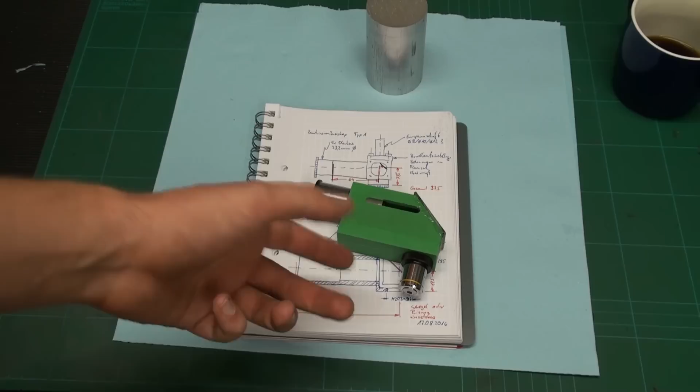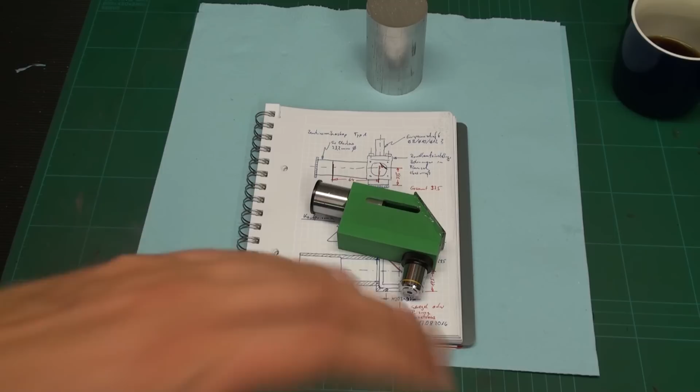Today I wanted to start a build on something that I wanted for the longest time, but I don't want to buy it. And that object is a centering microscope. That's a microscope that you clamp up in the spindle of your milling machine, and it has a right angle eyepiece, and you look into it and you can look down through the center of your spindle on the workpiece. It has a crosshair, so you can pick up marked out lines or edges of workpieces or just everything you can see.

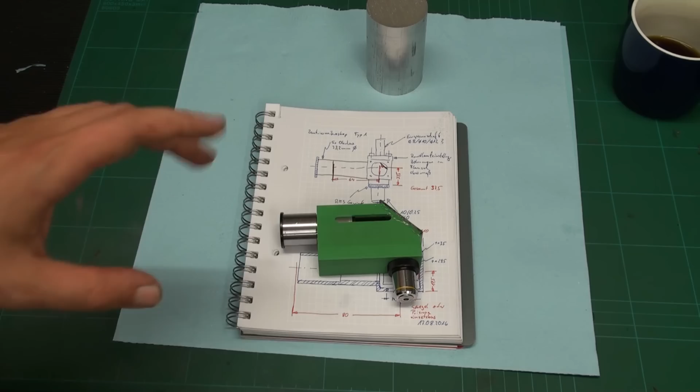There are a lot of manufacturers that build them in very high quality, but they are quite expensive when you buy them new, and even on the used market on Fleabay or something like that, you pay quite a lot of money. And being very ignorant, I was thinking I could build my own. I ordered some microscope optics on eBay. This is a 5 times eyepiece, and this is a 10 times lens.

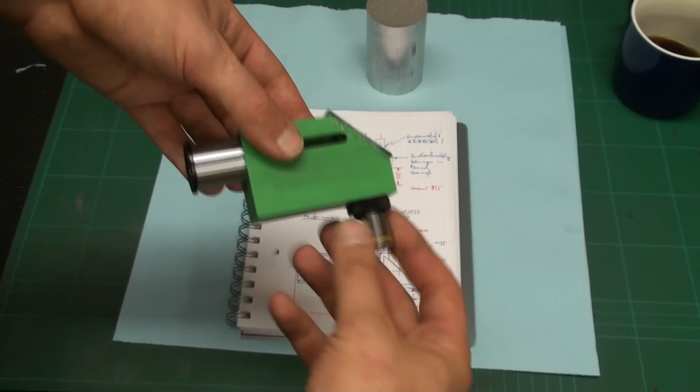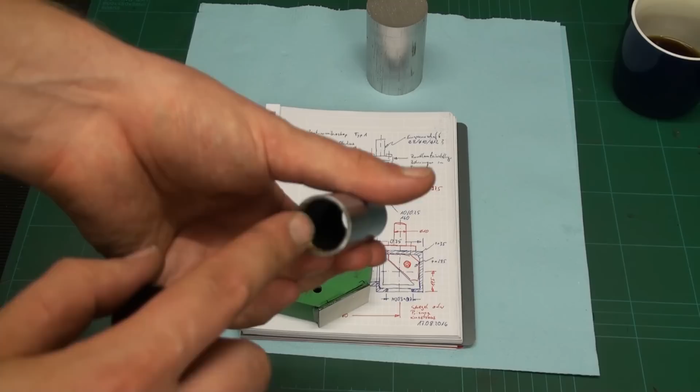Got screws in here, and this is just a very rough prototype. I took a piece of RenShape modeling plastic and I machined out this prototype. The eyepiece goes in here. Down here is a mirror at 45 degrees, like in a periscope. I'm going to add a crosshair that has to go into the eyepiece. We can unscrew the back side here. Then we can place an insert with a very fragile wire crosshair in there.

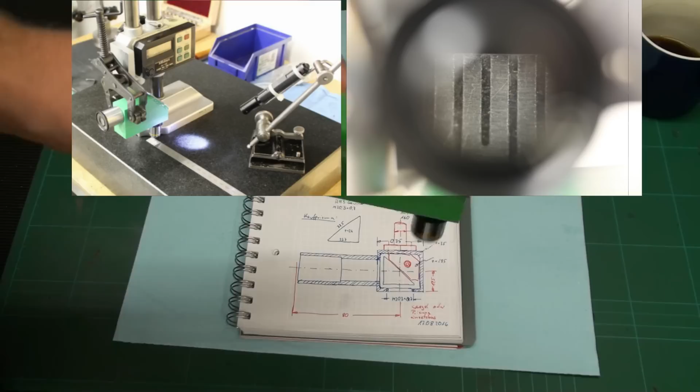But as I said, this is just a prototype, and it has obviously no way to clamp it in a milling machine. I had this set up on the surface plate, clamped to my height gauge, and I just set it to height and watched through it against a steel rule to see if the magnification is good enough and if the working distance, which is about 8 millimeters, is good enough. And yes, 8 millimeters is, for me, okay.

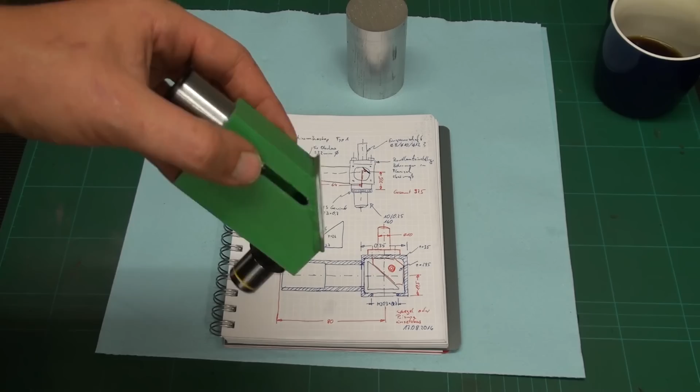And yeah, this is just proof of concept for me, because I know approximately nothing about optics. In the final design, I don't want to use a mirror. I'm going for a prism. I ordered an optical glass prism that I'm going to use, and it will be machined out of aluminum.

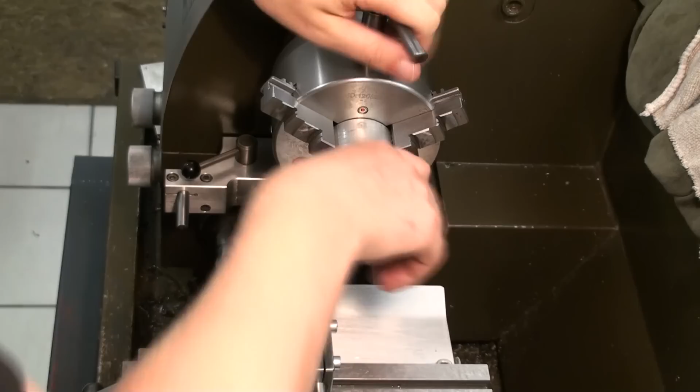Okay, there we go. That's the chunk of aluminum. It's free cutting aluminum with some lead content, so the chips break nice and short. And I'm facing it off on one side. And I break the corner with a file. Now I'm turning down the step to about 25 millimeters in diameter. That's the part of the microscope where the eyepiece will go in. And as you can see, the material produces a very nice short chip. The occasional rat's nest still happens from time to time, like on the end of a cut.

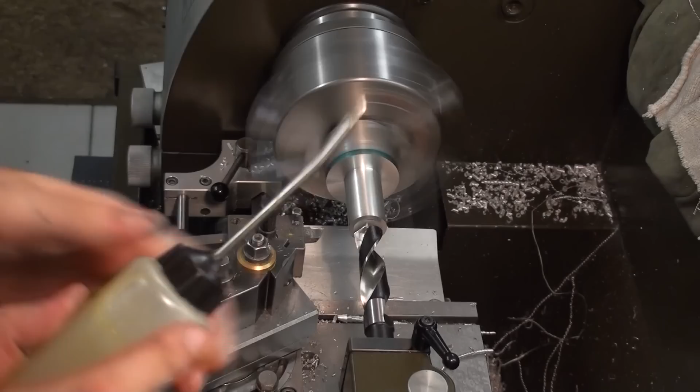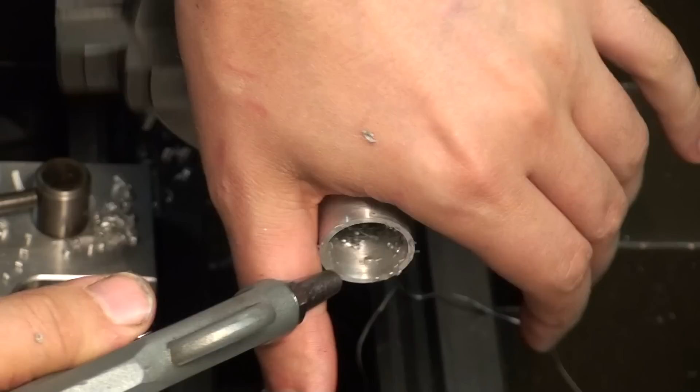Taking a face cut on the end, and we drill out the center with a 19 millimeter stub length drill, using some water-soluble oil to lubricate the cut. And boring it to final dimension. I'm using one of my shop-made high-speed steel boring bars that I showed in an earlier video. Taking a finishing cut. And the eyepiece fits quite nice. I'm breaking the corners with a scraper. That's the quick and dirty way when you don't want to use a chamfering tool.

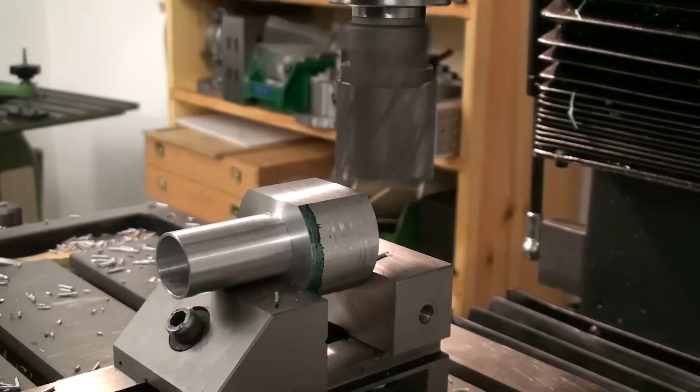Now we're over at the milling machine and we mill down the remaining cylindrical part to be square. And I'm using a 40mm Morse taper 4 shell end mill that has an integrated shank. This is quite a nice cutter. It's carbide tipped, and back in the day this was a really expensive cutter. I'm pretty sure the carbide goes along the whole length of the cutting edges.

Then I roughed out the inside with a 10mm roughing end mill to a depth of about 30mm, and the vacuum cleaner is a great help when you cut such deep cavities. Finishing the sidewalls with a relieved 6mm end mill, very long stick out, but works very well. And first finishing cut, and again taking a light finishing pass to clean up the walls.

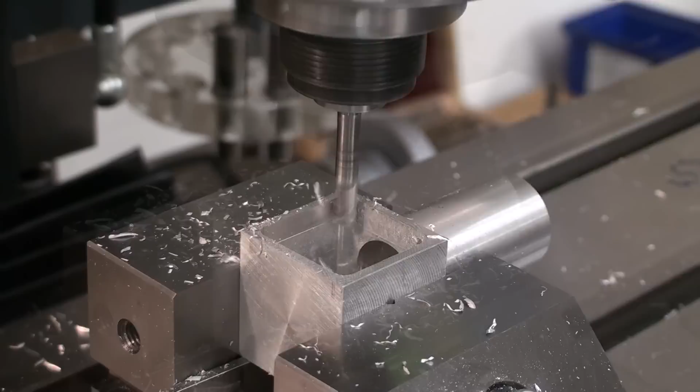Next step will be to change the setup. Here you can see the cavity. We rotate it by 90 degrees, set it up in the vise again, and use a rotor broach or a core drill to hog out a hole for the microscope lens.

And we change to the Wohlhaupter boring head and machine the hole to final diameter. Taking a roughing cut and the finishing cut. The thread is an M20.3mm thread with a 0.7mm pitch.

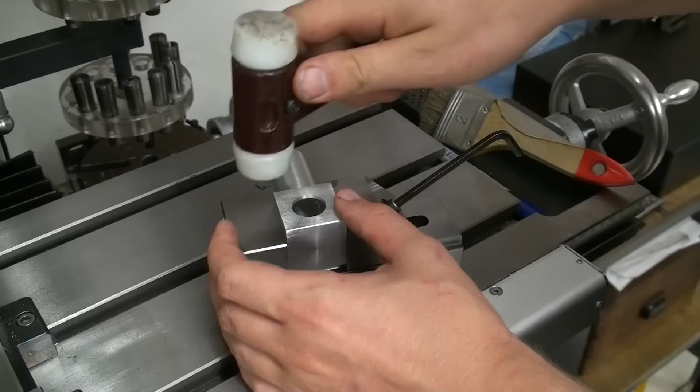That's the part finished on the milling machine. Now we set it up for threading. I clamp it in the grinding vise, seat it down, just very lightly tapping it down, and I set the grinding vise on the four-jaw chuck in the lathe. I'm using the bull center and the tailstock to align the bore.

Just to give me a starting point. Lock it in place. And do an idiot check if the bore is on center. And it was within 2 or 300ths of a millimeter. Now I'm cutting the thread. I have the setup running at about 100 RPM. And it was not a problem at all.

The microscope lens fits very nicely into the thread. No problem whatsoever. And this part is almost done. Needs only a little deburring, but I'm quite happy.

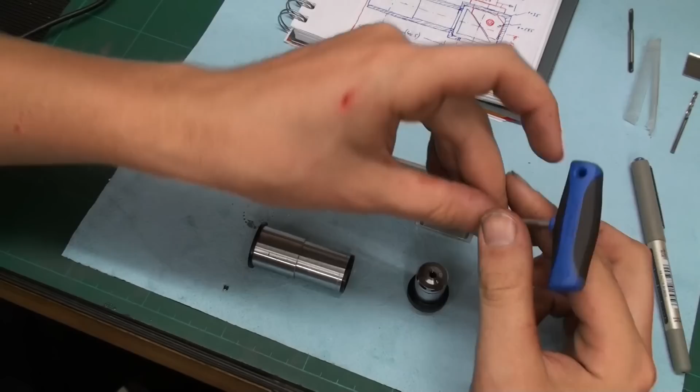Off camera I machined some additional parts. I made this shank with 10mm diameter, which can go into a collet of the milling machine, and it screws onto the body with 3 screws, and the holes in this flange are oversized, so when I loosen the screws,

these 3 guys here, I can move the shank around, and I can use this to center my crosshair, which I will add to the eyepiece, with the line of sight, so to center it with the line of the spindle, so when you turn this, it's always in the center of the spindle. For that we need the run-out adjustment.

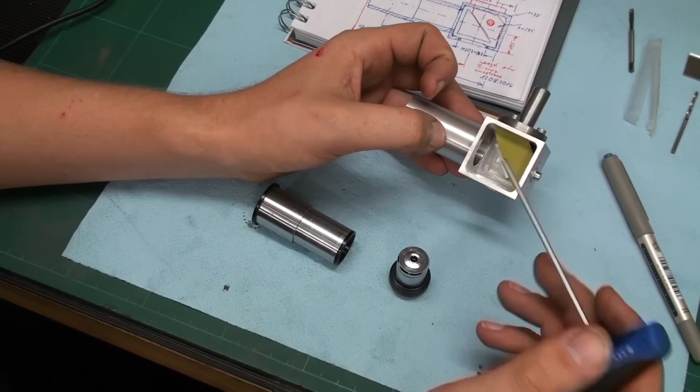I also made a triangular piece. This is some polyurethane foam modeling plastic. I took this material just because it machines very easy and very fast. It's good for prototyping. And I machined it at 45 degrees. It screws into the body from the outside through the slot.

I had the intention to make it adjustable through the slot, but then I decided just to let it rest against the inside of this housing, and I glued a piece of mirror, which is not the best choice. This is just a shaving mirror that I salvaged and cut down, and this piece is just super glued against this triangular piece, and it's in the line of sight of the eyepiece.

And that's pretty much all. Down here we have the thread for the microscope optic or the lens, and here we have our close fit, not very close, for the eyepiece. And that's how it looks now. This is the prototype. Now we can set it up in a milling machine and take a look through the eyepiece. We will see if we can get a video image through it.

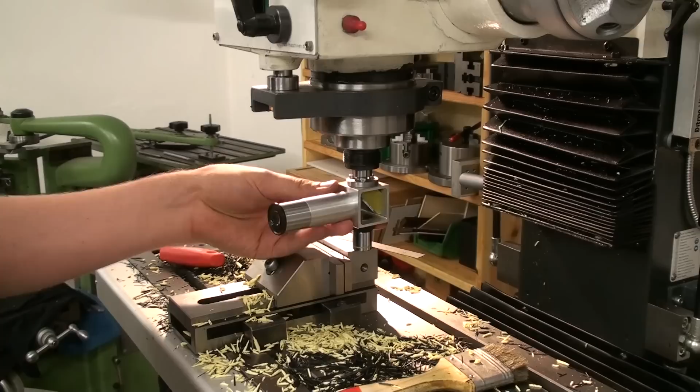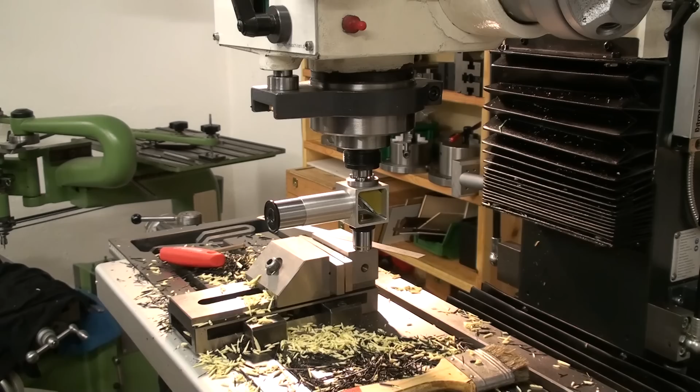So let's see. Okay, I have a 10mm collet in the spindle. Clamp it up and make sure that you don't turn on the spindle of the machine when you have something like this set up. This might get ugly. And now we have our microscope in the spindle.

Okay, we have a more or less clear view through the eyepiece. This is quite hard to set up. And as you can see, when I move the steel scale under the microscope lens, you can see it moving in the eyepiece. And by moving the quill up and down, I can adjust the focus, and I can move the part with the cross slide under the microscope.

So far this works quite well. I'm very happy how this came out so far. And the only thing that's left for a centering microscope is of course a crosshair. And then we can use it to pick up features on parts and also use it for measuring if we use the DRO.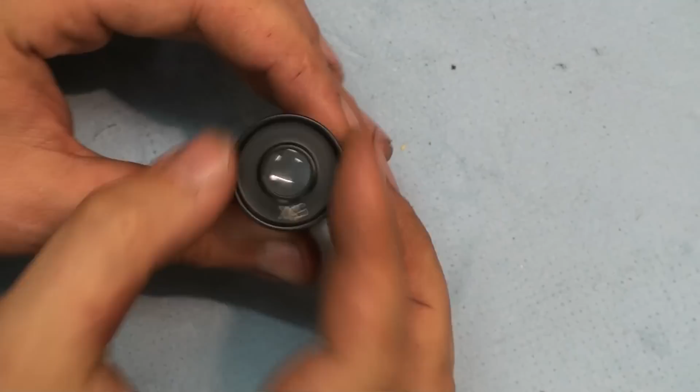Okay, I figured out the crosshair. When we take a look through the eyepiece here, you can see that I have a crosshair now. It's out of focus because the camera is focusing on the stuff around it.

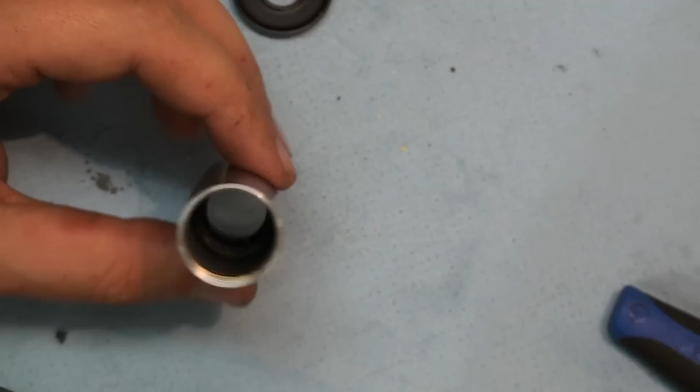But when we take the rear lens off and take a look inside, and I need something to point at, you can see the crosshair down in there. The material for the crosshair is 0.1mm copper wire. This is insulated copper wire for winding spools or inductors. The electronic guys have that stuff on hand.

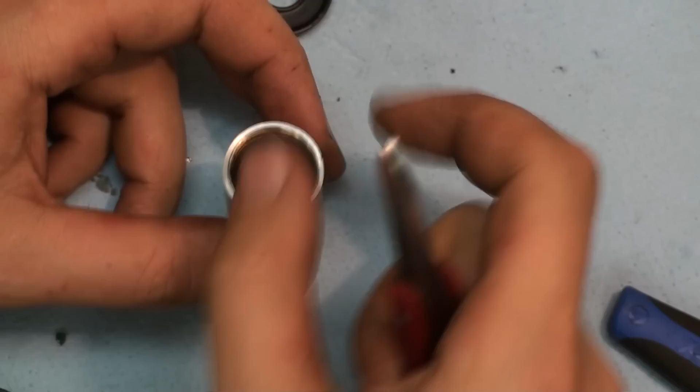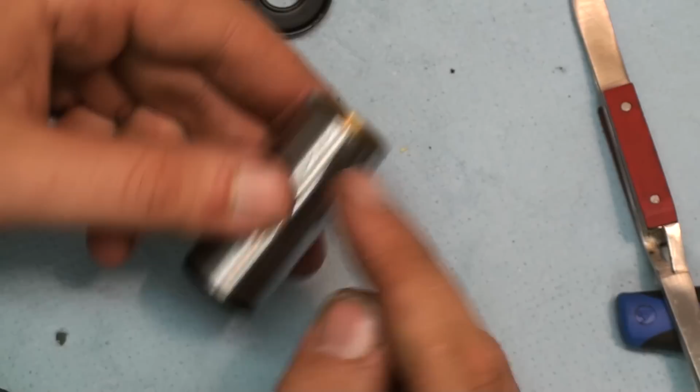And I machined a plastic ring with a groove, and I drilled 4 holes, and I threaded some wire through it so it forms a cross. And I wrapped the wire around the groove I machined into it, and pushed the ring down into the eyepiece and pushed it down and screwed the eyepiece back together and took a look until the wire crosshair was in the focal point of the eyepiece.

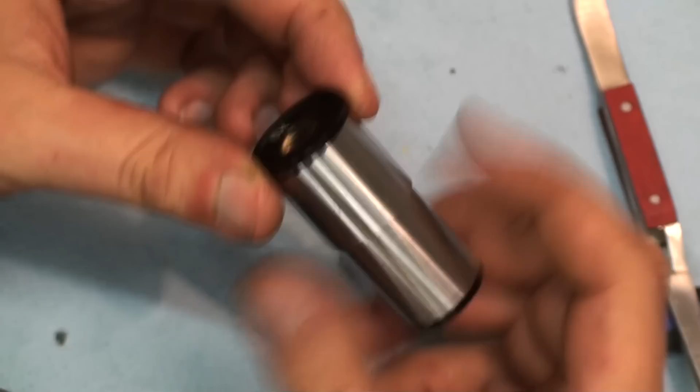I hope I don't mess up the terms there, but I think the focal point is the right term for this, and that's about here. I had to push it back and forth a bit until it appeared nice and sharp when I looked through the eyepiece. This works so far quite okay, and as you can see, the wire has a kink in it, and it's out of center by itself. That doesn't matter for this purpose. We're just testing it here. We can screw it back together and go to the machine and take a look through it.

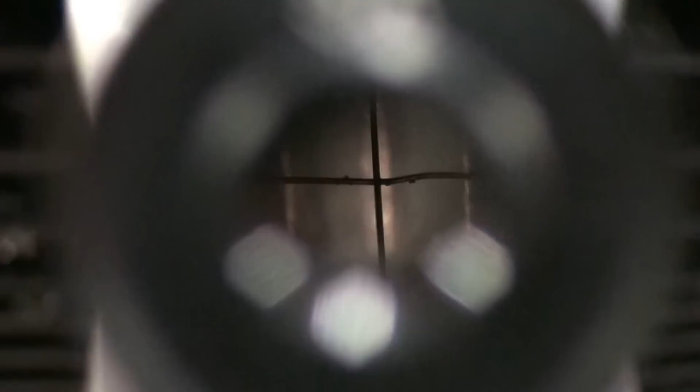Okay, we have our crappy image through the eyepiece again, and you can see that the crosshair is in focus, more or less. And now I'm going to move the quill of the milling machine up and down until I have a sharp or a focused image in the viewfinder of the camera. What we're looking at is again a steel scale.

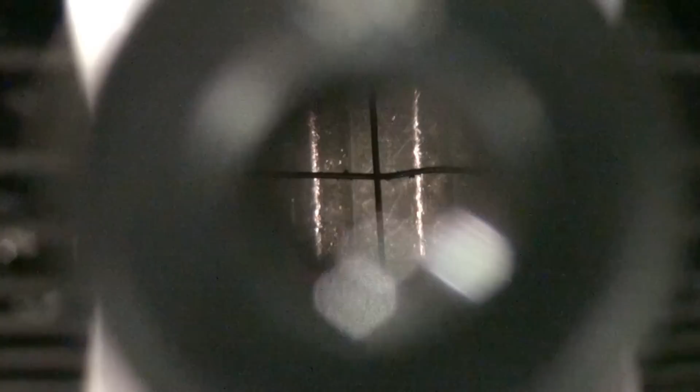Okay, let's make a better crosshair. We start again with a piece of Delrin, black Delrin, and I'm turning it down to the internal diameter of the eyepiece. And this stuff machines so beautifully. Taking a finishing cut. And I machined a step on the end so I can clamp it in a collet to drill the cross holes.

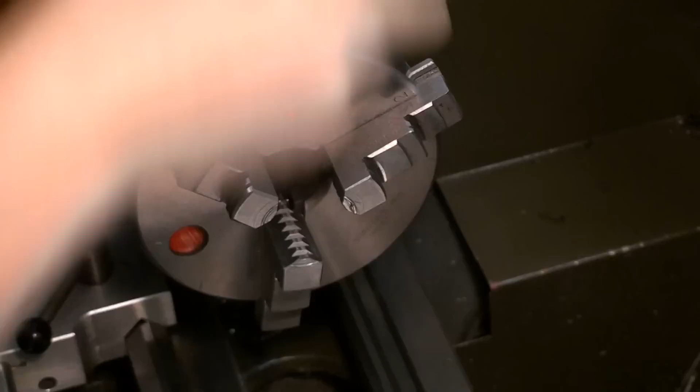I machine a groove and I part it off. The groove is to wrap the wire around it later. Parting it off. There it goes. Now I flip it around, clamp it on the smaller diameter. Drill and bore the inside. And that's pretty much all the turning work. Now we go over to the bench.

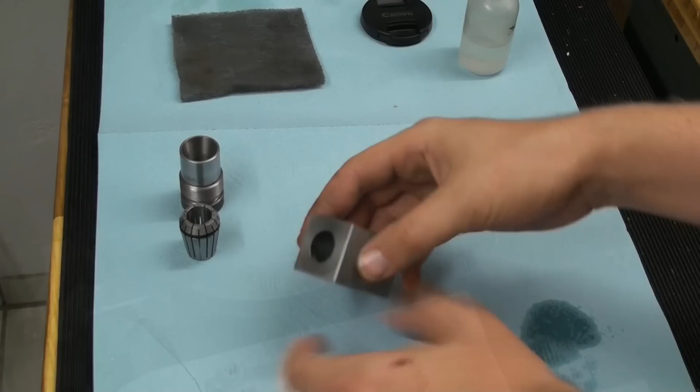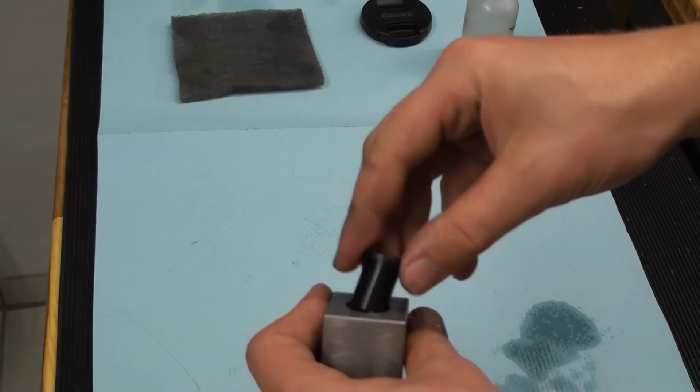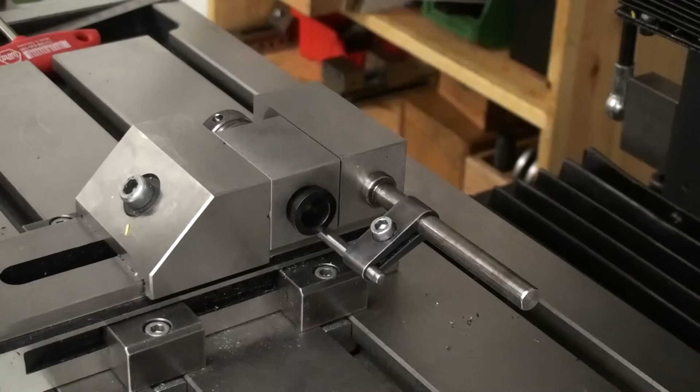I have my ER25 collet block and I hold the part on the smaller diameter in this block. And on the milling machine and the vise I have set up the stop. And I'm using the edge finder to center on the collet block in the Y direction, touching off on both sides and taking half the distance. That's the center of the collet block. Touching off on the end of the collet block. And I really like these edge finders. They are very, very precise.

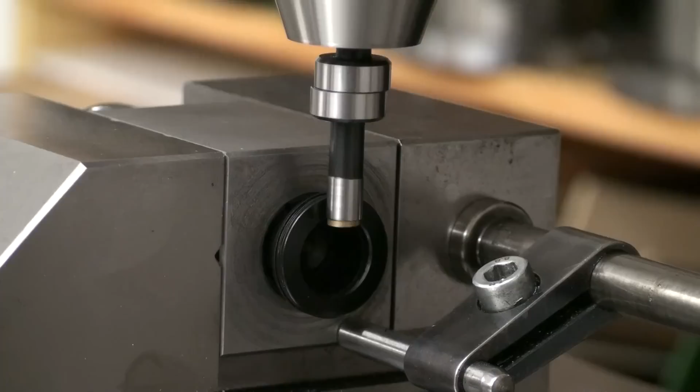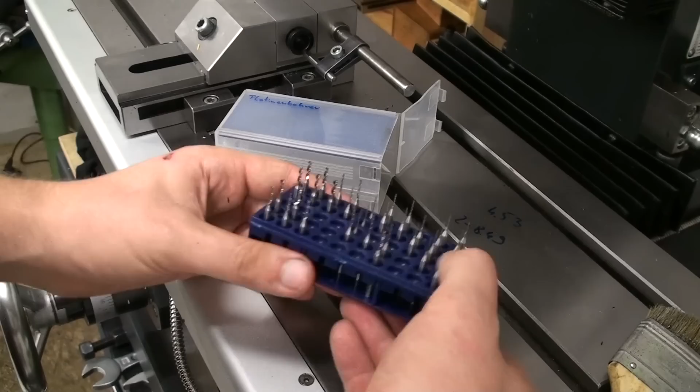And now for the drilling, I have PCB drills, carbide, down to 0.3 millimeters. And I use them in plastic and aluminum, but preferably only in plastic. They are very brittle. That's 0.3 millimeters. Be very careful when you handle these drills. Most of them break due to clumsiness when handling them. As you can see, it's not very much of a drill there.

And now I'm drilling the first hole for the wire crosshair. Just pecking. I'm running the drill at 3200 RPM. And we're through. Take the collet block out, flip it around 90 degrees, butt it up against the stop, drill the next one, and so on until I have all 4 holes around it.

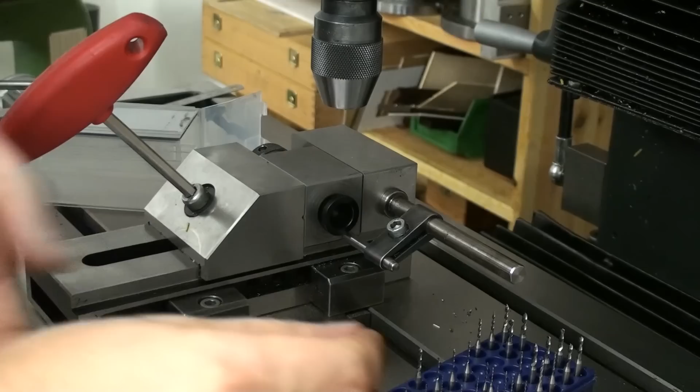Now we take the drill and put it carefully back into its case. If you leave that drill out, it will be broken within a few seconds. Not very robust, these little buggers. Back on the lathe and parting off the finished part. Catching it with the scraper and removing the little burr that's left from parting with the same scraper.

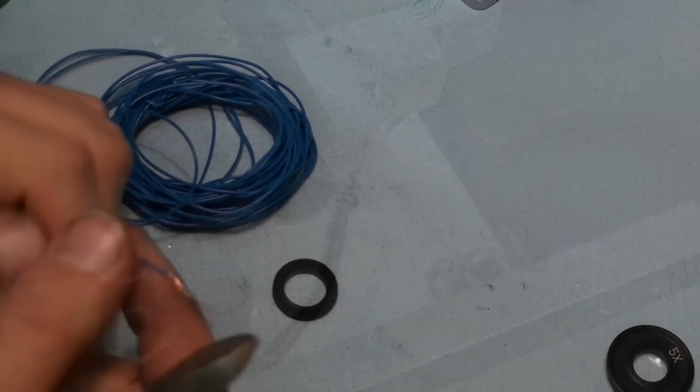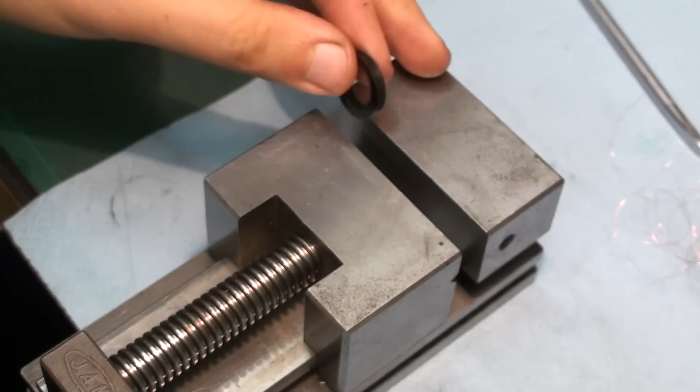Now I'm taking some 0.14 square millimeter multi-strand wire and remove the insulation. So I have the bare copper wires exposed, and I cut a bunch of them off. They are 0.08 of a millimeter in diameter, and I use them for the crosshair. I'm threading the wires through the hole using some tweezers and going down into the other hole.

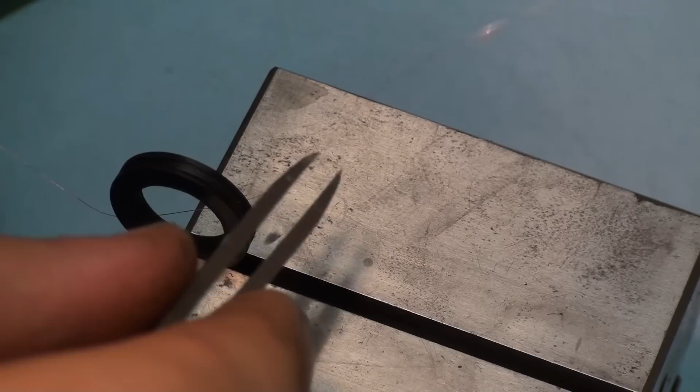I still see good enough to do this work without magnification. And thread the wire through it, pull it through, and wrap it around the outside of the ring into the groove. That's the reason for the groove. And just make something like a knot.

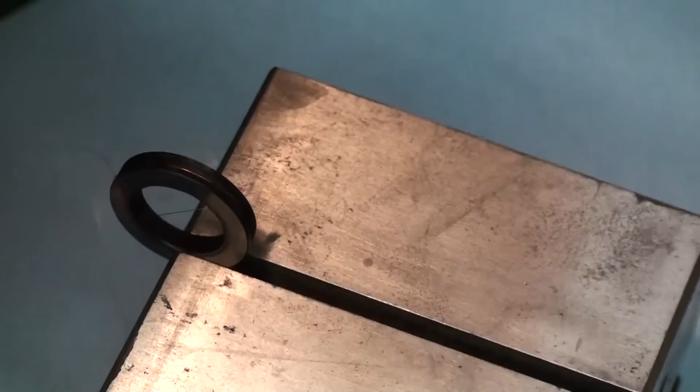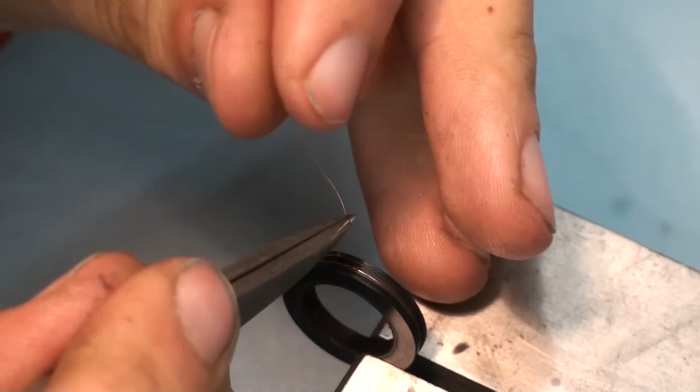And the same thing for the second wire. First securing the first one with a drop of super glue so it doesn't unwind itself. Now we go for the second wire, fiddling it through the hole, pulling it through and going out the other side.

And wrapping the wire around and twisting it up, securing it with some super glue, pulling it straight, and there we go. That's the finished crosshair. It goes into the eyepiece, and you need to push it down into the focal point of the first lens of the eyepiece, using a piece of Delrin rod to push it evenly down.

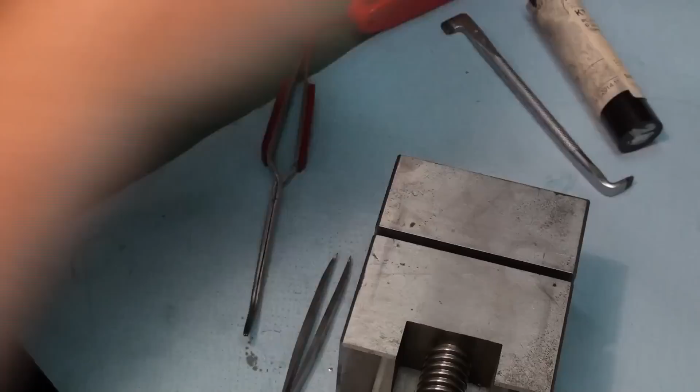There you can see it, and screwing the eyepiece back together like this. And it fits into the microscope, very nice. And now we can test it. Okay, I set the camera up again in front of the microscope eyepiece, and you're looking down onto a piece of steel that I blued up with some blue marker, with some Edding, and I scribed a cross line into it. And the vertical line, the metallic looking vertical line you see there is the scribe line.

And you can see the new crosshair moving across the scribe line, and I can perfectly line it up with the scribed line. And the crosshair shows nice and sharp in the eyepiece, and it's not too thick, it's not too thin. I think that's a pretty good start. I might try to get some thinner wire.

The copper wire I picked out of the flexible 0.14 square millimeter wire is 0.09 millimeters in diameter. That's 0.09 of a millimeter. That's about 4/1,000 of an inch, roughly, 3.5 thou, something like that. And you can see that the crosshair is nice and crisp.

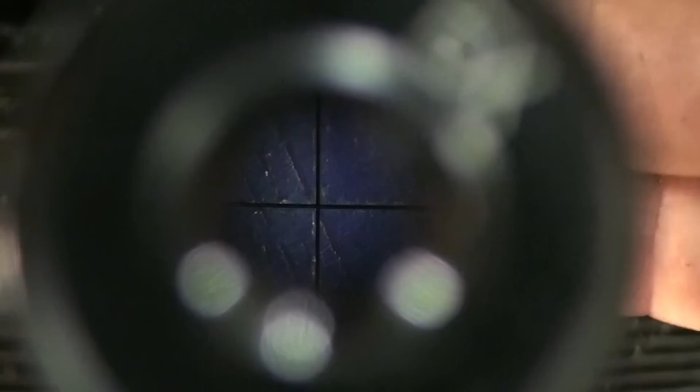I like it. And I also aligned the runout when I turned the microscope in the spindle 360 degrees around. The crosshair stays in the center. Not perfectly, but within 1 or 2 hundredths of a millimeter. That's already quite okay for such a rough prototype. I think we have a winner here.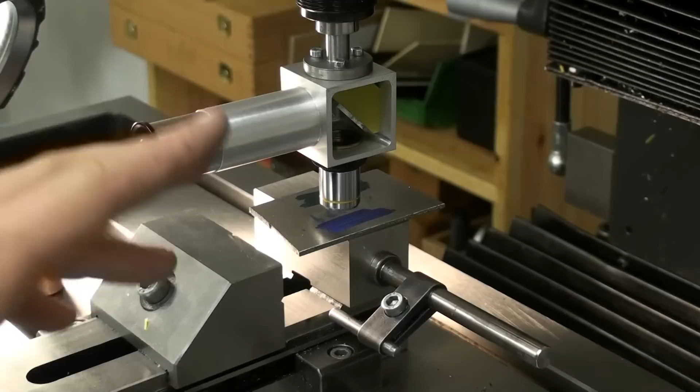This is a pretty simple, very basic prototype with only 2 bought pieces. Only the eyepiece and the microscope lens are bought. They're together about 50 bucks. That's not super cheap, but it's optical stuff, so yeah, costs money. And a broken razor shaving mirror.

I'm looking into it. I ordered a glass prism, which will be better, but I'm also going to experiment around with the discs out of hard drives. The hard drive discs are finished to a very high surface finish, and they are mirror-like, and they are surface mirrors in fact, because the surface is reflective. And I will also try those as a mirror for the eyepiece.

And I will redesign it, make it a bit more slim, and I will change the runout adjustment up here, because the oversized holes and knocking the microscope around with a copper drift is not very cool. So apart from that, I'm pretty sure that we will revisit this topic, and it might be interesting for some of you.